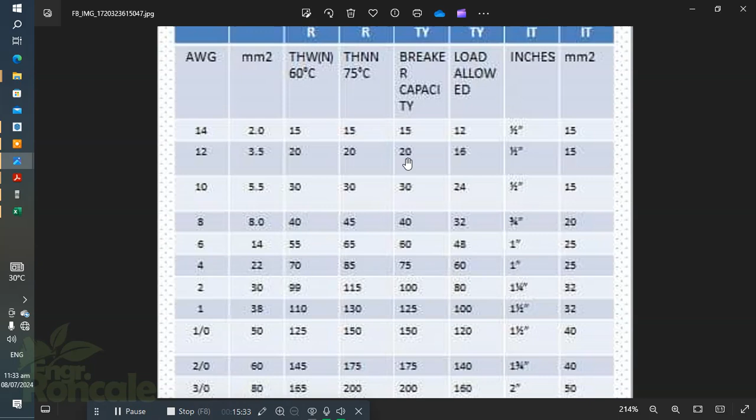Square mm wires. And then it's time for us to look here, this is 1,800 over 230. Okay, I already changed that too, and we have 7.826. That's still okay here. So we have a total amperes of 46.887. And now we are going to compute the total current, which is the IT.

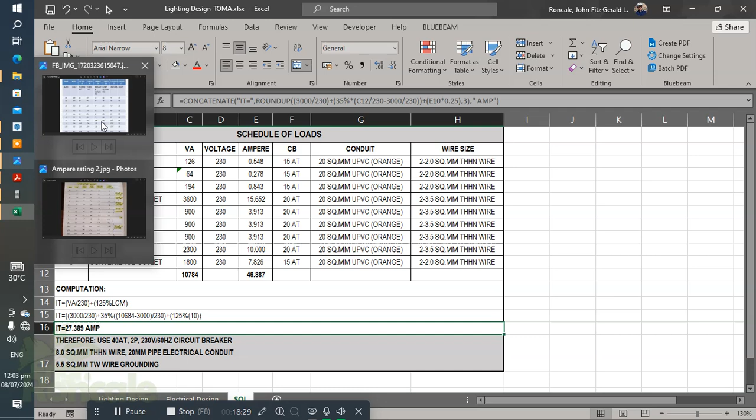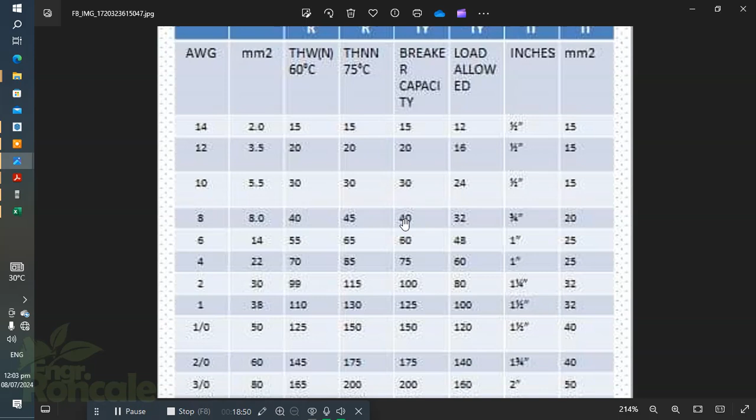Ito yung sa main circuit breaker natin. And then therefore we should use 40 amperes pag tiningnan natin yung 27.389 dito sa reference natin. So here load allowed is between 24 and 32. So hindi pwede yung 24, dito tayo sa 32, and that breaker capacity should be 40. So we should use 40 ampere circuit breaker, and we have here the conduit is 20 mm, and then the corresponding wire size nya is 8.0 mm squared THHN. So kaya yung nilagay dito 8.0 square mm THHN wire. Tapos yung conduit niya is 20 mm pipe electrical conduit.

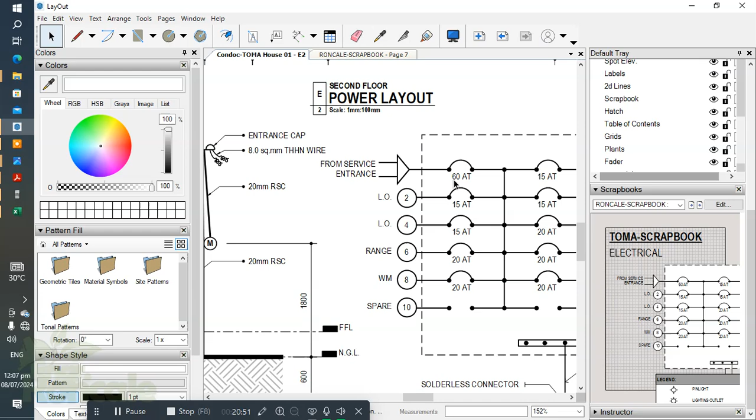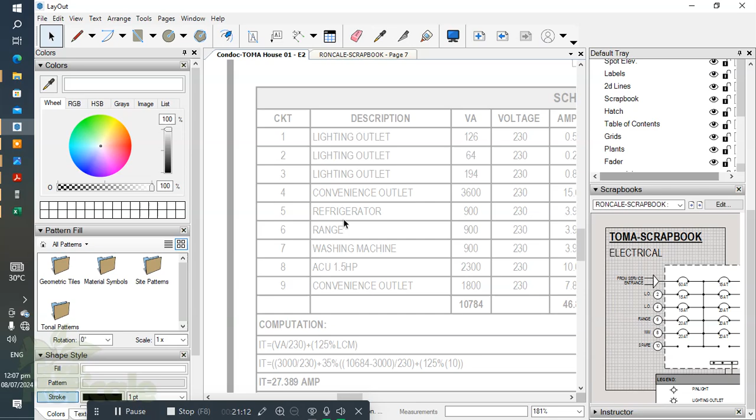Here from service entrance, and then yung 1, 2, and 3 is lighting outlet, yung 4 is convenience outlet, CO, and then yung circuit 5 is, tingnan natin yung circuit 5 dito, refrigerator, range, and washing machine. So lagyan natin dito refrigerator, range, washing machine, and then yung 8 is the ACU, and then yung 9 again is the convenience outlet, tapos may dalawang spare tayo dito, 10 and 11.

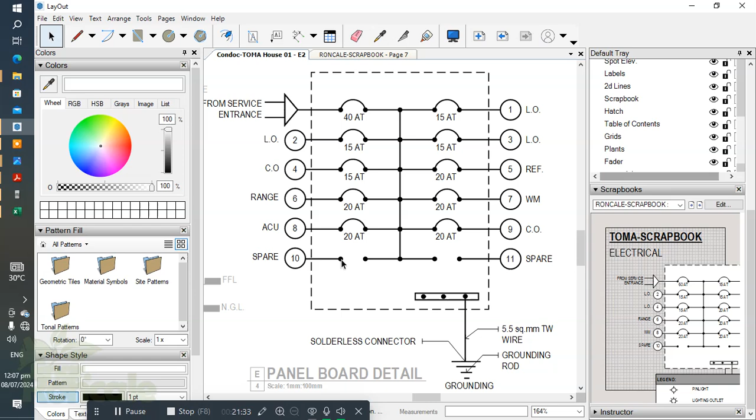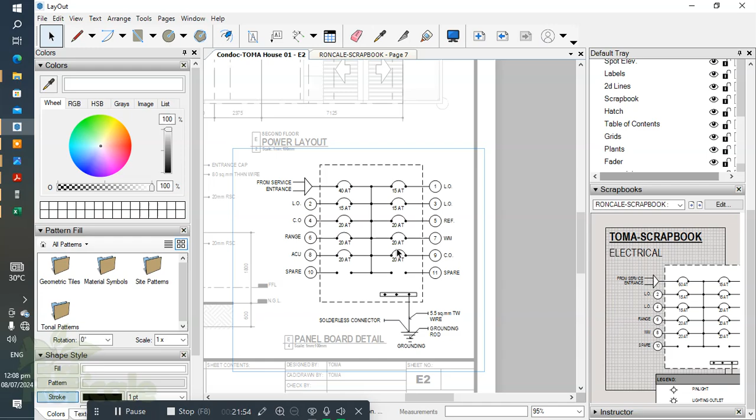Okay, here, so sa lighting outlet gumamit tayo ng 15 amperes, tama naman yan. And then dito sa convenience 1, gumamit tayo ng 20 amperes. Kung naalala nyo sa circuit 4, here convenience outlet, and meron tayong 20 ampere na circuit breaker. And then sa range 20, then ACU, and then convenience outlet. Balik tayo sa 15 ampere dito. Okay, and may dalawang spare tayo dito. And I think dito grounding 5.5 square mm.